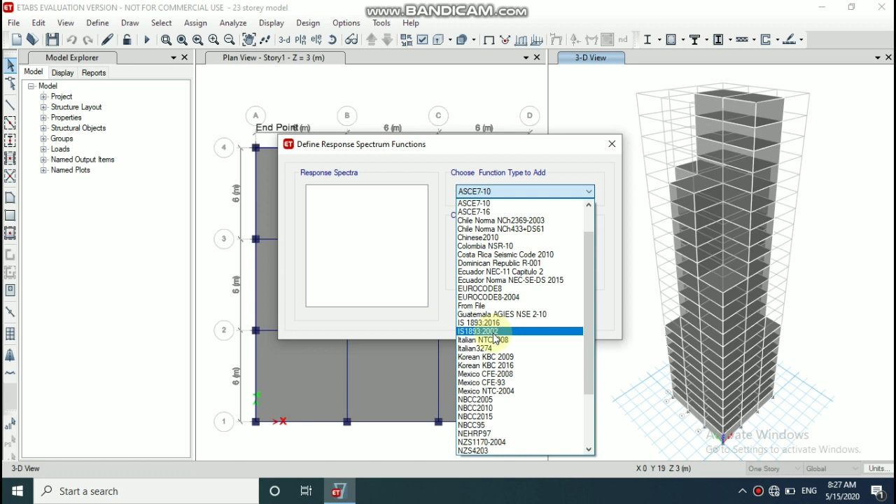Click on add new function. Function name response spectrum, type response spectrum. Click on add, load type acceleration, load name U1, function response spectrum, scale factor 1633.5 from IS 1893-2002 code.

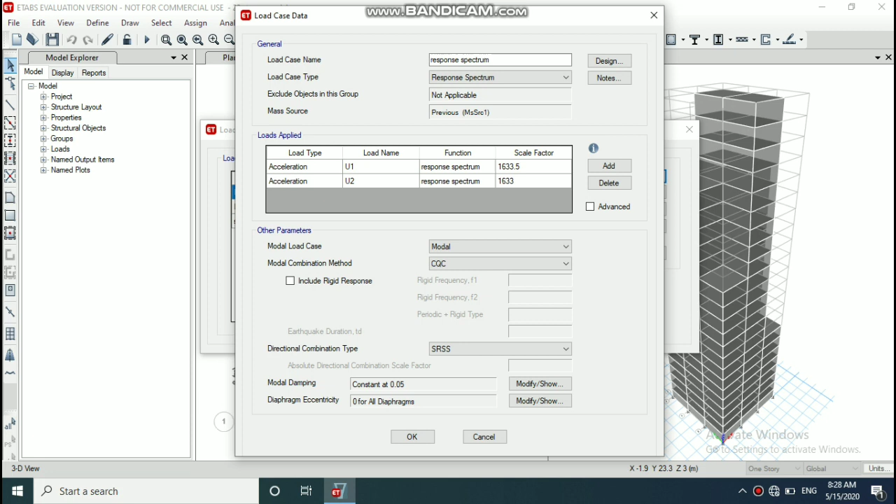Click on add. Again load name U2 as load acting on both X and Y direction, function response spectrum, scale factor 1633. Click on OK. Again OK. After defining the spectrum function, next step is to run structure analysis on building model.

So now go to analyze menu, select load case to run. As we are performing seismic analysis, no need to run the analysis for dead and live load. So change dead and live load as do not run. Now click on run now. Once analysis is complete, the analysis result will be displayed.

By default, the displacement value of element will be shown in 3D tab. Right click on any part to see displacement value. Here we can see displacement value of story 22. Also we can check shear force and bending moment diagram and torsion, stiffness, moment and other structural parameters.

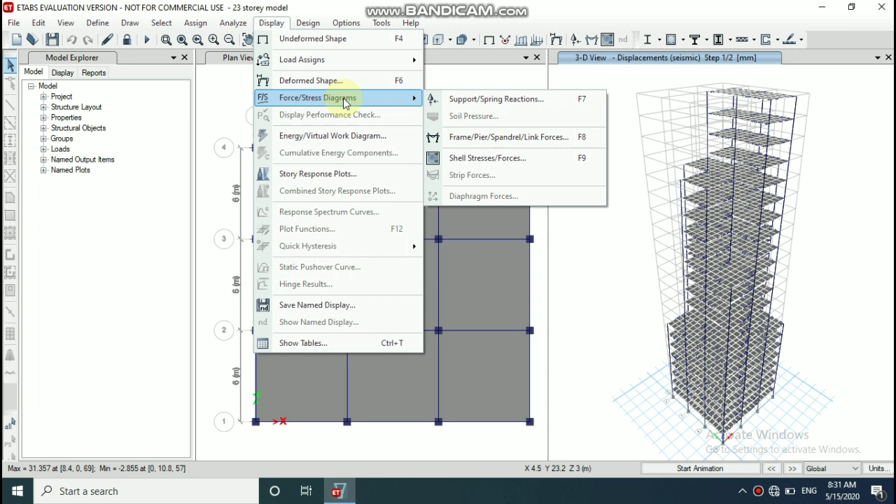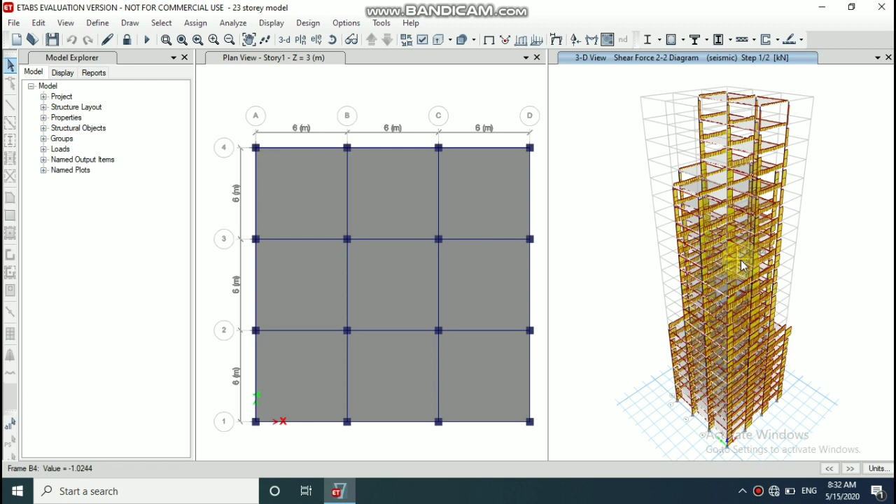Now go to display menu, select force or stress diagram, select frame. Now select shear 2, apply and OK. Now here we can see shear force diagram. Now again go to display menu, select force or stress diagram, select shell stress, select F11, click apply and OK.

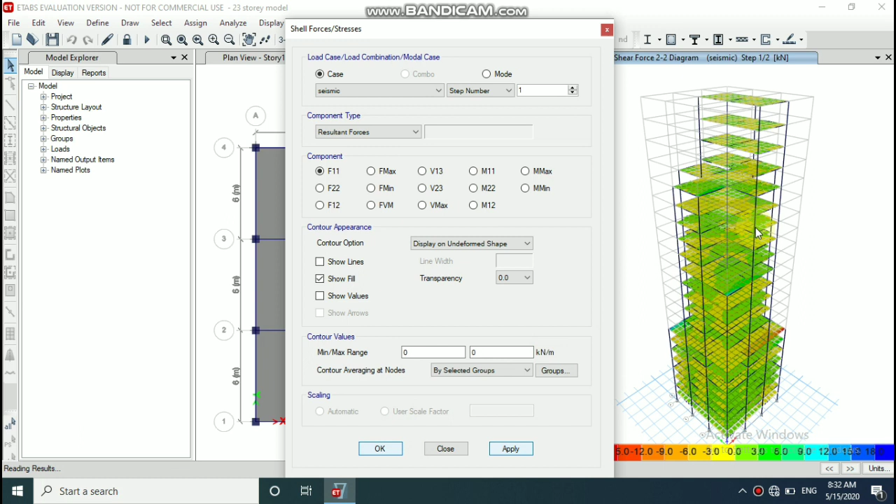Now here we can see stress developed in building. Now again go to display menu, select story response plot. Here we can see maximum and minimum displacement. Now analysis is complete. Next part is to check design.

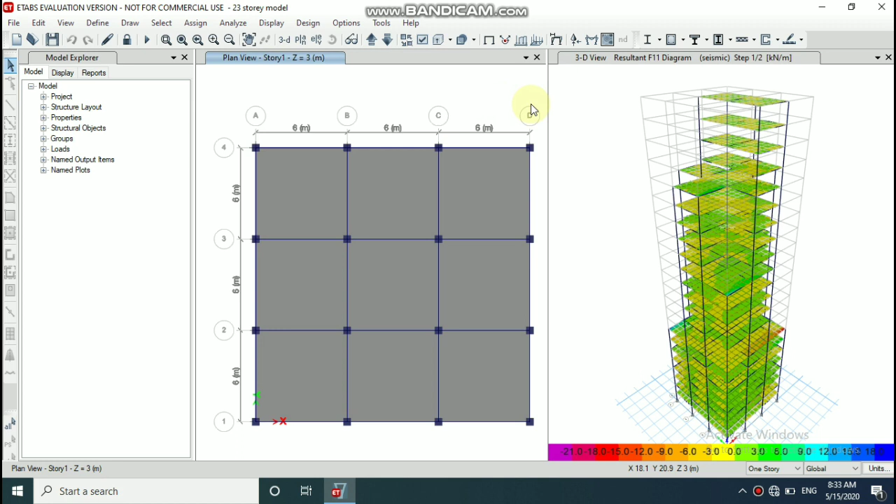Now go to design menu, select concrete frame design, start design check. As design check is processing, wait for some time. Once design check is complete, we can see longitudinal reinforcement. Here we can see longitudinal reinforcement. Also we can see report, project report and summary report.

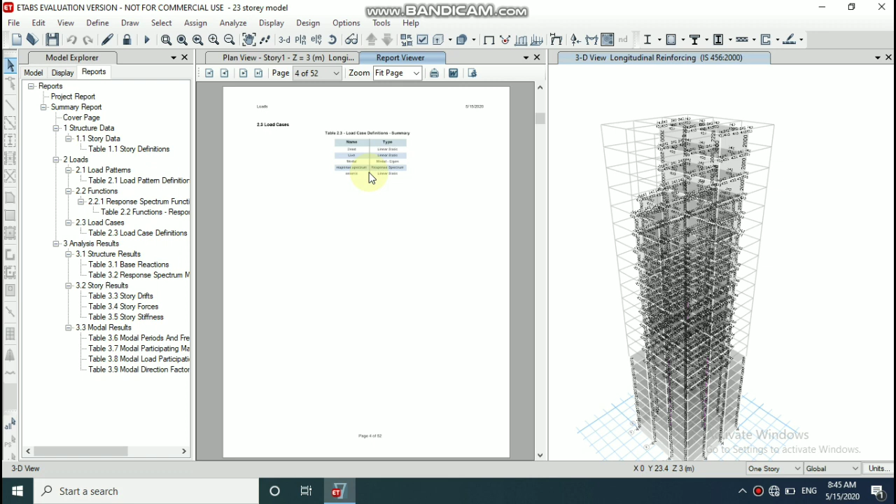Here we can see project report, analysis result, load case, shear force, bending moment, stiffness, moment and other details. Now go again to design, concrete frame design, verify all members pass. Here we can see all our concrete frames pass the design check. Now click on OK. Now the second method is time history method for analysis of seismic resistant building.

As I have done analysis, our model is locked now. So first unlock model, then go to define menu, select load pattern, select seismic load, click on modify lateral load, select X direction only as it is supposed to be seismic load acting on only X direction. Other data will remain same. Click on OK.

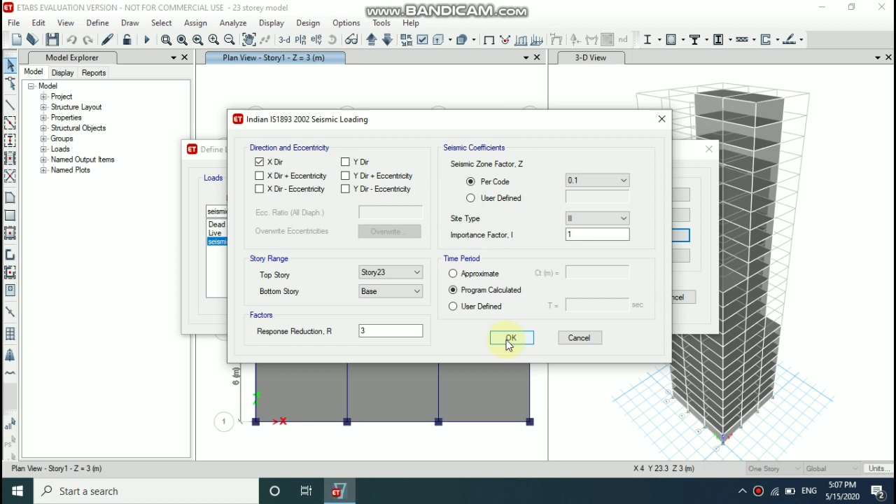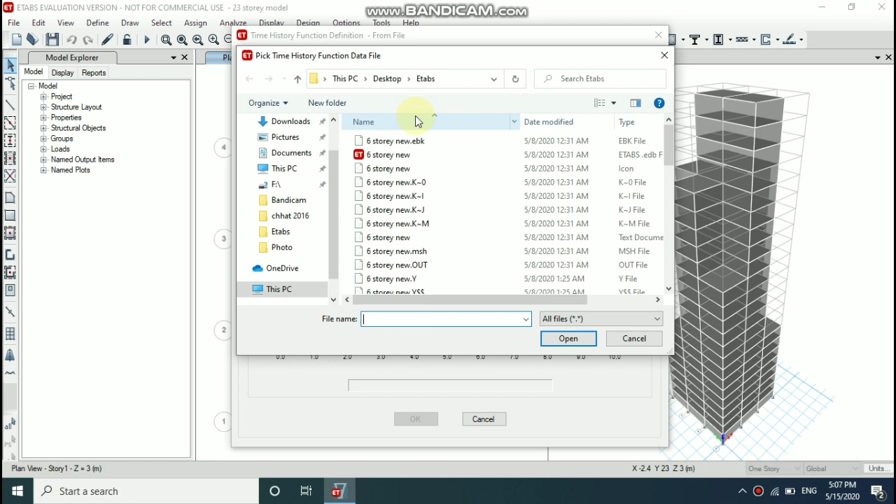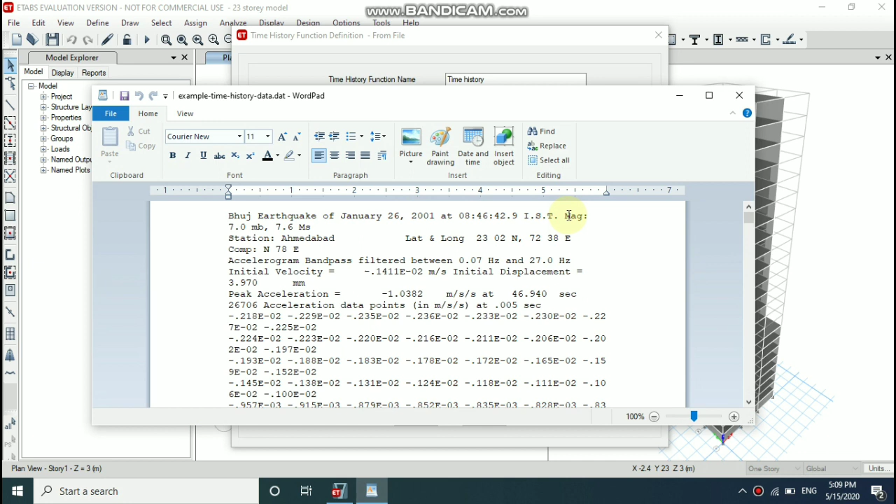Now again go to define menu, select function, time history, choose function type to add from file, add new function. Now browse file, because in time history method previous earthquake history data should be available. Now we can view file, as this is record of earthquake. Select fixed format, click on OK.

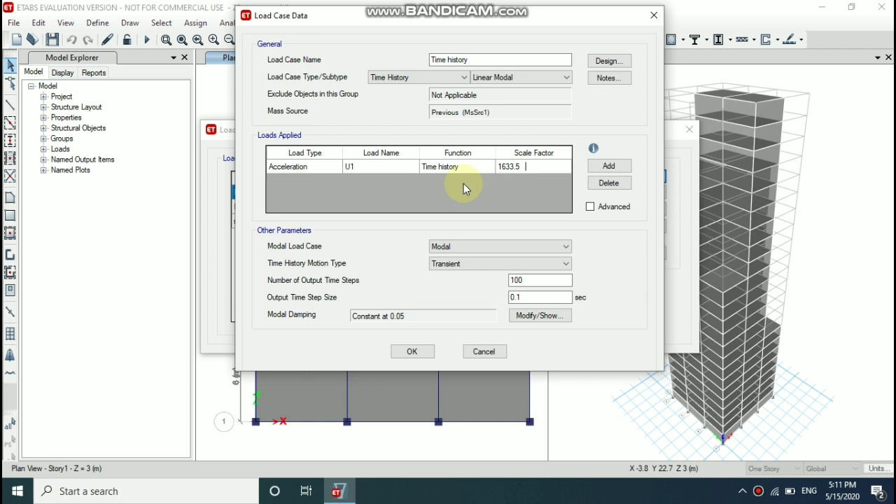I have defined time history function. Now go to define, select load case, add new case, case name time history. Scale factor is taken from IS 1893-2002 code, and as seismic load is acting on only one direction, consider only U1. Click on OK, again OK. After defining the time history function, next step is to run structure analysis on building model.

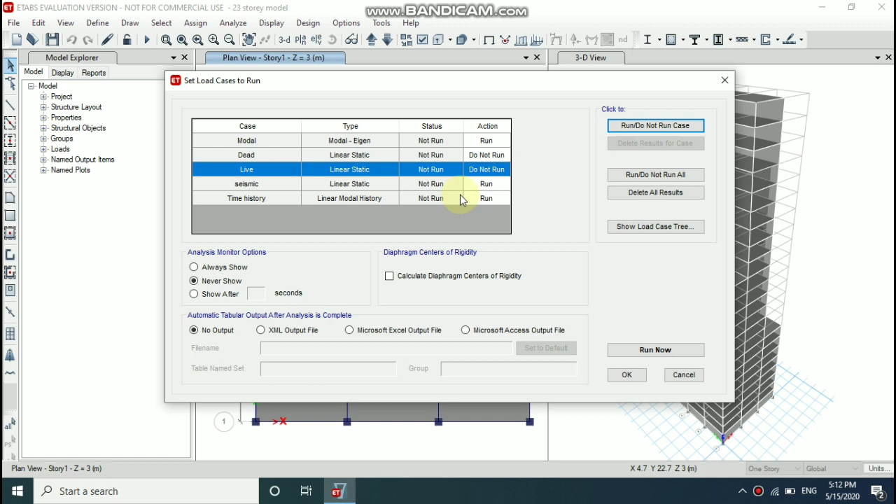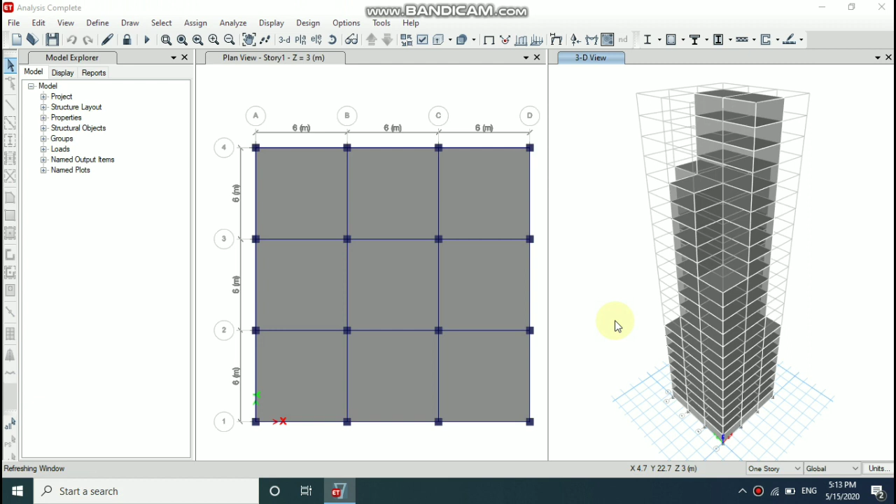Go to analyze menu, select set load case to run, change dead load and live load as do not run. Click on run now. Now analysis is in progress here. Once analysis is complete, the analysis result will be displayed. By default, the displacement value of element will be shown in 3D tab. Also we can check shear force, bending moment, stiffness, which I have already shown in response spectrum method.

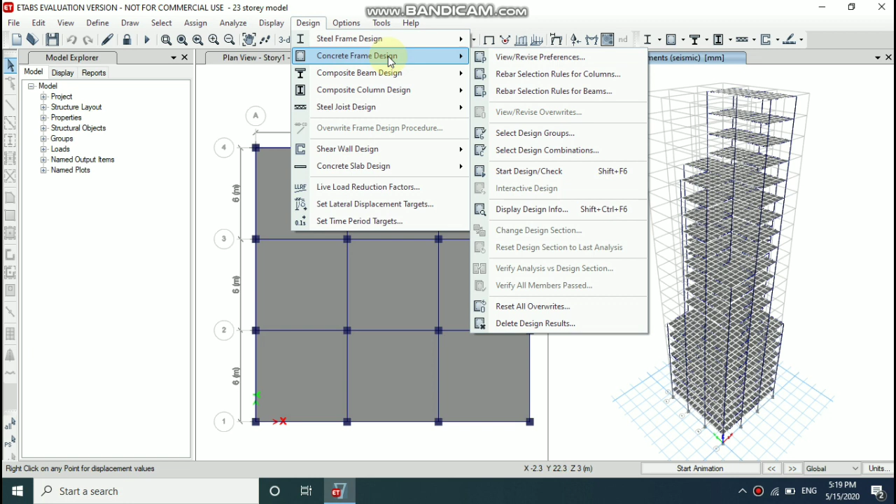Now right click on any part to see displacement value. Here we can see displacement value. Now after completing the analysis, next part is to design check. Go to design menu, select concrete frame design, start design. Now after completing design check, here we can see reinforcement value of building. If design check fails for some frame member, increase the dimension and redesign again.

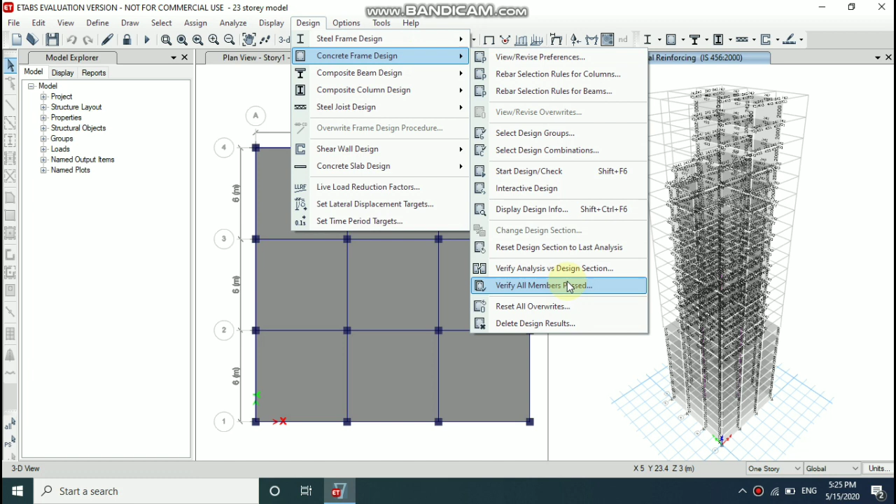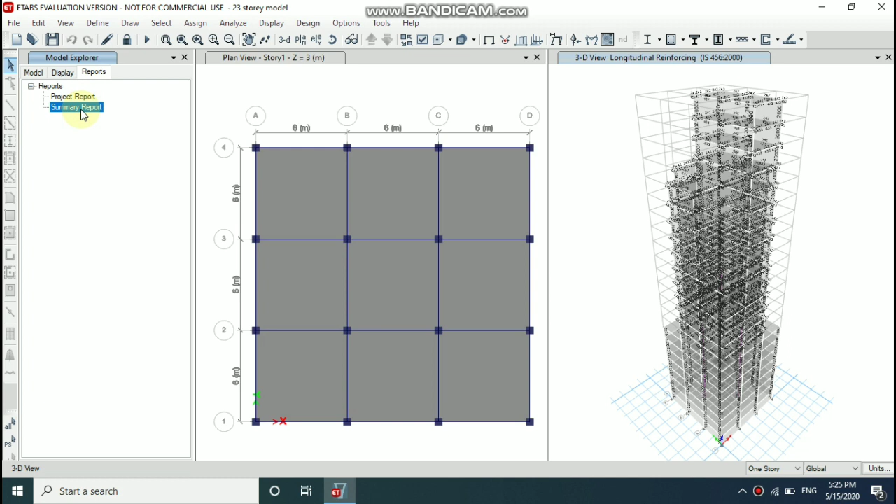Now again go to design menu, select concrete frame design, verify all members pass. Here we can see all concrete members pass the design check. Now our model is complete. Now we can see our project report. Go to report. Here we have project report or summary report. Double tap on summary report. In project report, we can see each and every detail of our project. Now our analysis and design is complete.